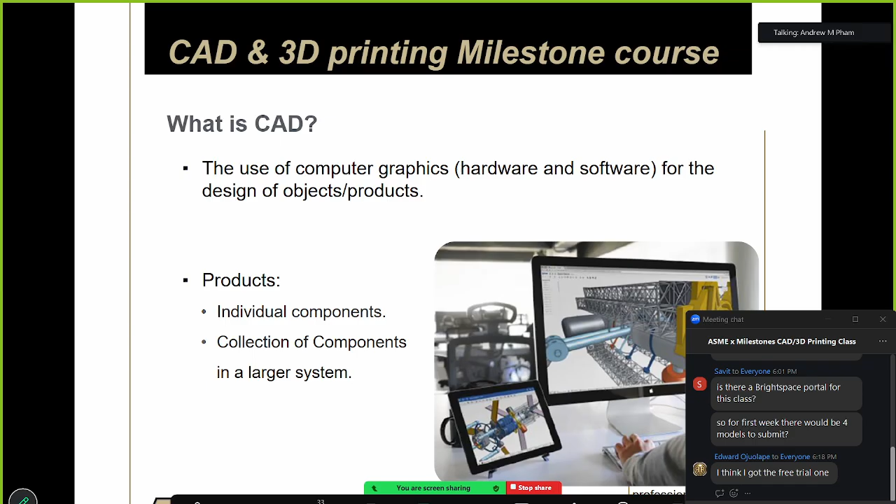I'm going to give a brief introduction to some of the stuff we're doing. I guess the first question is, what is CAD? CAD stands for Computer Aided Design. Basically, before powerful computers existed, we would have rooms of people on easels and paper just drawing up parts, and that's how we did it for a very long time. But then some smart guy at MIT decided that he should use a computer to model things instead, because it allows you to quickly edit things.

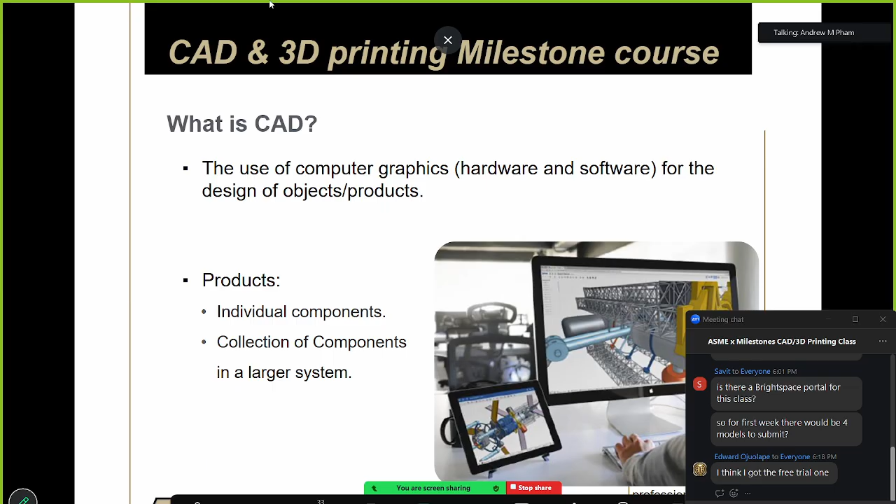So it's pretty cool, you can kind of simulate parts, see if they're going to fail before you make them. That can save you a lot of time and money in the long run. There's both 2D and 3D CAD programs. Fusion is a 3D CAD program, which is pretty sweet.

And then I guess the last thing is there's a manufacturing component. A lot of CAD programs now aren't just CAD programs. I mentioned simulation, which used to be a separate thing, and manufacturing often needed another separate tool in addition to a CAD program. So companies will market their CAD programs as CAD packages because you can do analysis and manufacturing in the same program. Fusion has the ability to do all of this, but we're mainly going to be working on the three-dimensional CAD design stuff.

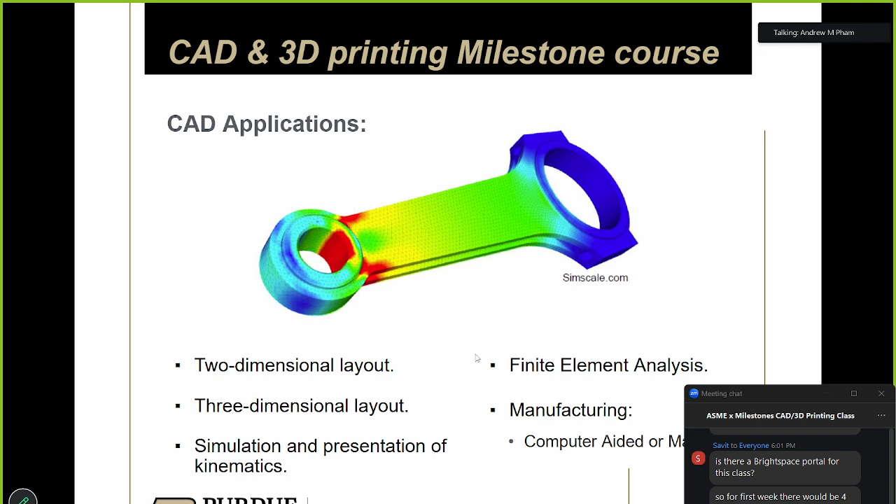But yes, there's a bunch of different CAD softwares out there, like I mentioned earlier. There are even different CAD softwares from Autodesk themselves. Fusion 360 is one of the programs they have, but they also have other programs like Autodesk Inventor and... what is it? Oh yeah, AutoCAD. I don't know why I forgot that.

Autodesk isn't the only company that makes CAD programs. Dassault Systèmes is also a very large, big competitor to them, their main program being SolidWorks. But there's a bunch of other programs like CATIA, Rhino, Onshape, and even free ones. One of them is called FreeCAD, and it's surprisingly okay, but it's also pretty buggy. Again, this is a Fusion course, so we're going to be doing everything in Fusion, with the exception of 3D printing, but we'll get to that later.

Alright, so with that all out of the way, I'm hoping everyone has their licensing at least somewhat in order to the point where Fusion is functional. So we're just going to start making some basic building blocks. Edward, I hope your thing is sorted out. Not to name drop you, but yeah.

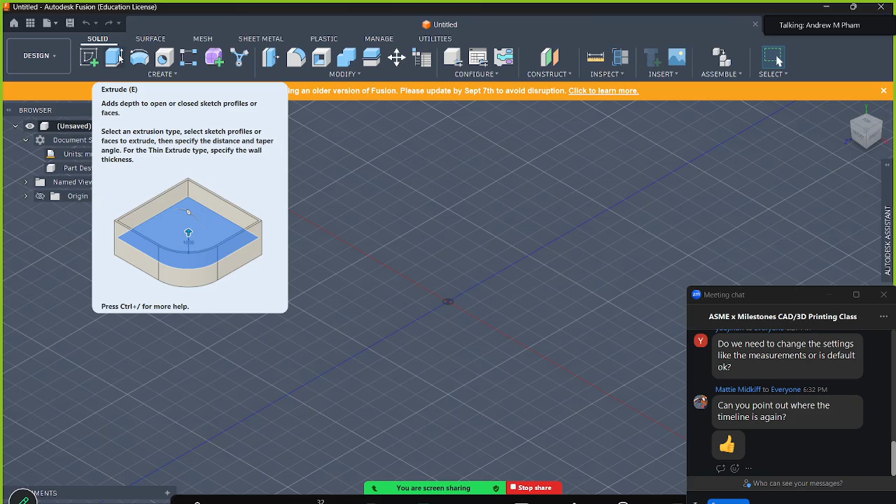One thing I forgot is how you manipulate or move around in the environment, so I'll go over that real quick. This is a 3D space, so it's important to know how to move around in it. You can see I'm spinning around right now, but there are multiple ways of moving around this environment.

The first one is zooming in and out. If you have a mouse, you just scroll in and out, and you can see the grid getting bigger or smaller. Pan is just middle click. One of the reasons we encourage you to have a mouse for this class is so you can use the middle click function—a lot of CAD programs utilize it, so it's pretty useful. The default is middle clicking to pan side to side, so it should be like this.

The last one is orbit, which is the spinning around thing I was doing earlier, and the default for that is shift and middle click. Personally, I changed the controls because I learned CAD on a different program with different controls, but they all essentially do the same thing.

If you don't have a mouse, the easiest way to orbit is using this thing we call the view cube in the right corner. It's a cube that shows you what orientation you're in. You can also use it to snap to certain planes—like here I can snap to the top plane just by clicking on it, and it becomes nice and flat. You can also hold down and drag it to orbit around. That's pretty useful if you don't have a mouse and need it in a pinch, but I do recommend a mouse because it makes things easier.

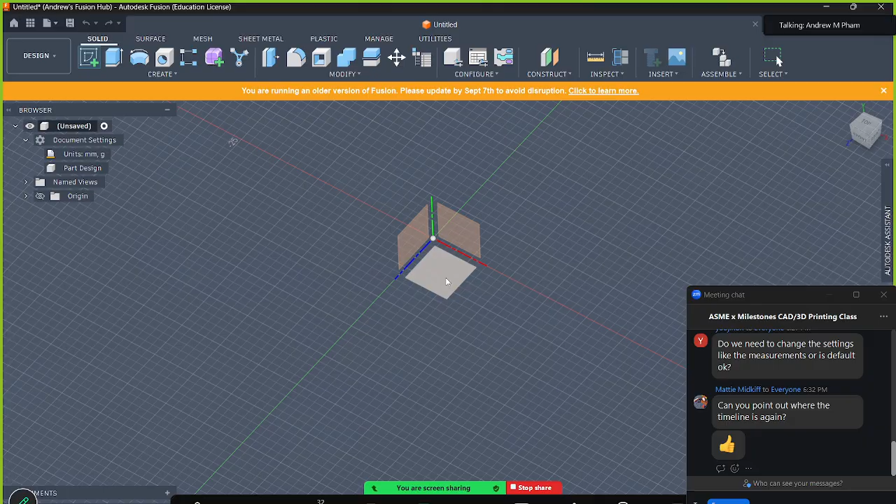I'm just going to select the top plane—it doesn't really matter for this assignment, but I'm going to start with this. When you select the plane, Fusion will snap to the plane you created so you can have a nice 2D workspace. So it snapped to the top plane, which I selected. You can see the toolbar changed—before we were under solid, but now we're under sketch.

These two toolboxes are going to be the most important ones, so you're going to get very familiar with them. For the sketch tools, you can see there's a bunch of different blue and white options, along with some red options. We're mainly going to be working with the blue and white options today—the red constraint stuff is more of a next week thing, but we're going to do a little bit of it today.

Again, we're making a cube, so I want some kind of rectangle. I'm going to select the rectangle tool. It's best practice to start your sketch from the origin, or base at least some of your design off the origin. The origin is this one point here—you can see it's kind of gray, and it's the intersection between this red and green line.

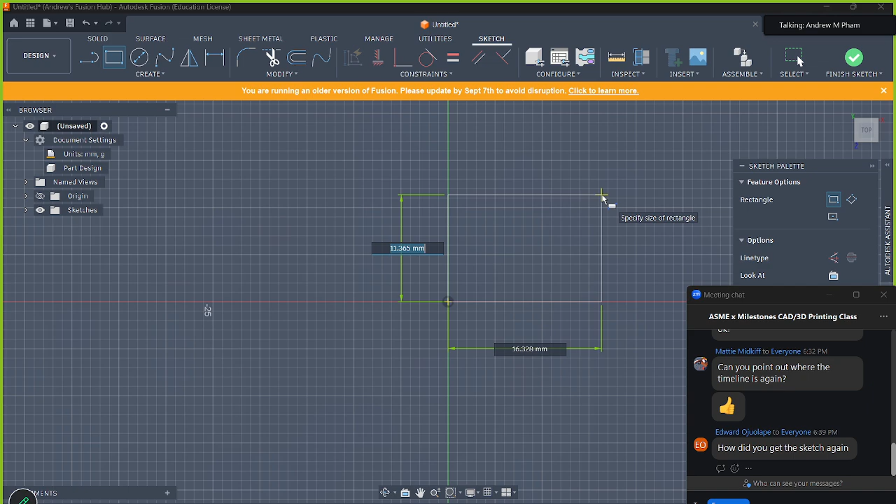So I'm going to create a rectangle. I'm going to start here on the origin. You can see Fusion will kind of snap to it. I'll pull out and make it some rectangular shape.

And then you'll see here that there's 4 lines, but 2 of them are different colors. There's 2 white lines and 2 blue lines. If you're running the light theme, then I think it should be 2 black lines and 2 blue lines, but essentially they're the same thing.

The main thing is that these white lines are constrained, right? Because I drew the rectangle from the origin, this point here is defined. And because of that, these two lines are also defined, because this is a vertical line and this is a horizontal line. And if it intersects with this corner, it always has to be vertical to go, or in this position to go there. These two don't really have any relation to the corner because these lengths haven't been defined yet.

So these can go anywhere they want. So you can see here, if I drag this endpoint here, it moves around.

So the goal for most sketches is to make them fully defined. And in doing so, you kind of create a very precise model of what you're making. So in this case, we're making a square. So these two lines should be equal to each other at some specified length.

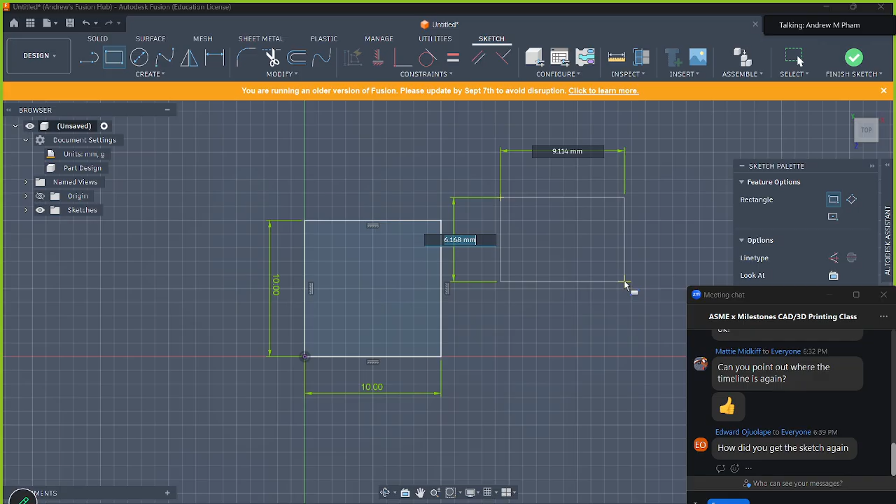Again, the reason for why you want to go from the origin is that when you draw something away from it, like in this case, you can see all of the lines are blue instead of just 2 of them. So, I hope that makes sense.

So the sketch is fully constrained. If you're running the light theme, then these lines will be black, but the same principle applies. You can see here, it's just a 2D square on this plane here, but we need to make it 3D.

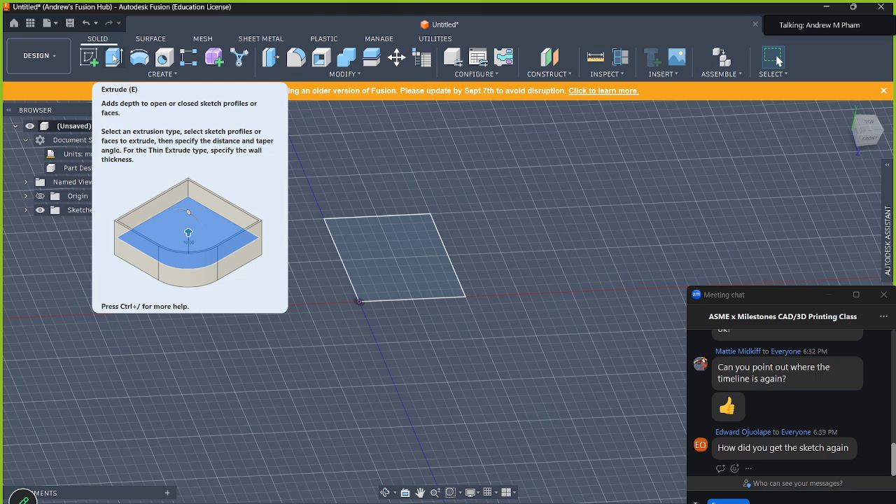So to do that, we need to extrude it. So I'm happy with this sketch. I'm going to finish it to exit the sketch, and then I'm going to extrude it. So there's this extrude function here, right next to the create sketch.

You select that, and then you specify how much you want to extrude it. There's a bunch of different parameters you can choose from for how the tool extrudes itself. In this case, we're just going to use a basic distance specification. So I'm going to set it to 10, and you can see it previews a cube.

There's a bunch of different options, and we're going to be exploring some of them over the next couple weeks. One of the big things is how it starts. In this case, it's starting exactly where we wanted it to, because the square sketch that we created is kind of where we want this to start. If you wanted it to be offset for some reason, you can set it to offset, or you can even set it to start at a certain object.

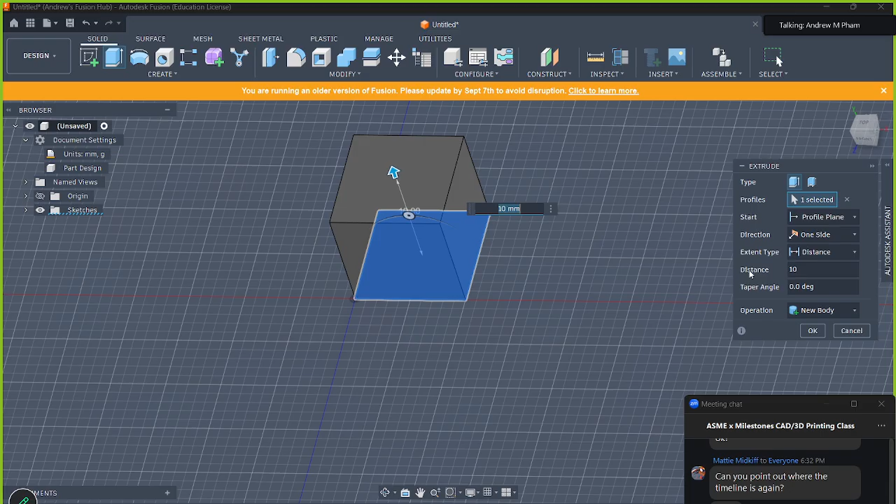In terms of direction, it's just one side because we're going one way, but in some cases you might want it to be extruded in two directions or symmetrically. We'll explore that in later weeks. Extent type again just defaults to distance because we're specifying some number, but we can have it extrude up to something, or even extrude through something, all the way through the model you've created.

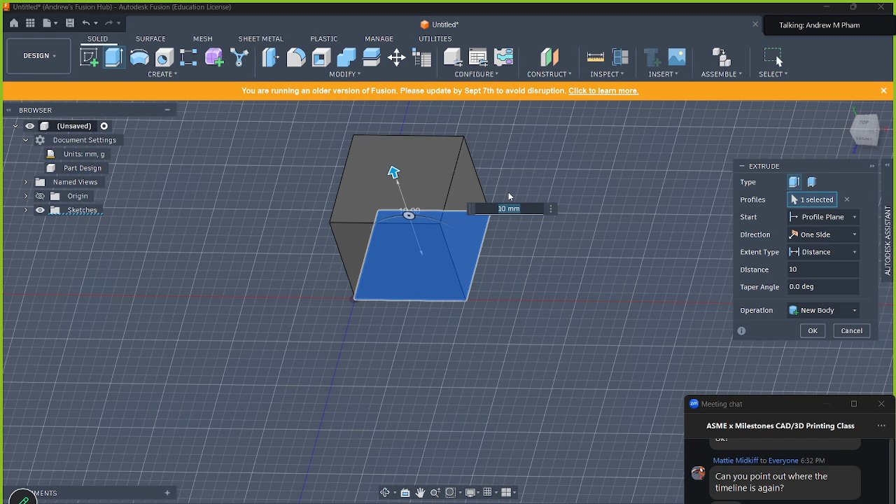But yeah, you have this basic cube. I'm happy with it. I'm going to press OK, and then bam, we have one nice, lovely cube.

Does anyone have any questions? I purposely go kind of slow on the first one.

Is the extrusion fixed? Is the extension fixed, like the 2D lines? Are you saying, is the extrusion fixed? Is that what you're asking? I'm assuming that's what you're asking. The extrusion is specified.

You can change the extrusion. The way you do that is by going into the timeline and editing the function or tool you used. You can see here it's a little bit more clear that it's a timeline now. The first icon is the initial sketch we made, and the second one is the extrusion. For example, if you wanted this to not be a cube and wanted the extrusion to be longer, you can right click the extrusion, hit edit feature, and then change this distance. You can make it 20 instead, and then it becomes larger.

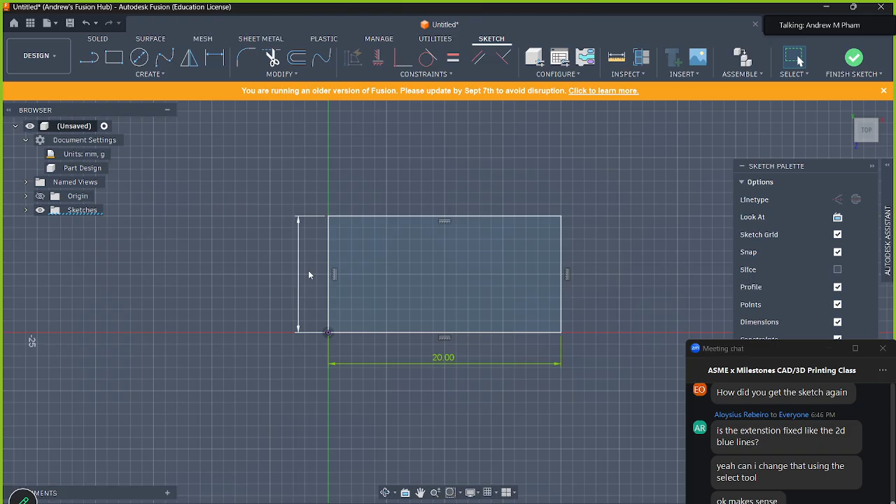And then again, you can edit sketches as well. This is why CAD programs are super powerful, because you can go back and change things. Back in the day, people did all of this on paper, and if you wanted to make a change, you'd have to erase it or start from a new piece of paper. But for this, you can enter the sketch, change dimensions, and finish it. And then boom, this cube is now larger.

The last thing for this cube is that we want to apply some kind of appearance to it. In this case, you can see this cube is gray. To do that, we need to open the appearance library and apply an appearance. I found the easiest way is just to use the shortcut and press A. So I'm going to press A, and then it opens the appearance library. You can see the default is just having this nice boring gray color.

For many of the assignments, I'm going to ask you to apply an appearance. When you do apply an appearance, please don't make it gray or black. I'd much prefer if it was a nice colorful color, just because it makes it a lot more clear when I'm grading. If it looks gray to me, I might take points off. So if you did apply an appearance that was gray and you're wondering why you lost points, that's probably why.

Generally, for me, when I do these things, I use the paint appearance. So you can go under paint, I usually go under glossy, and then you can select some kind of color. Again, please don't use gray. Let's make this cube blue. So there's this nice blue color.

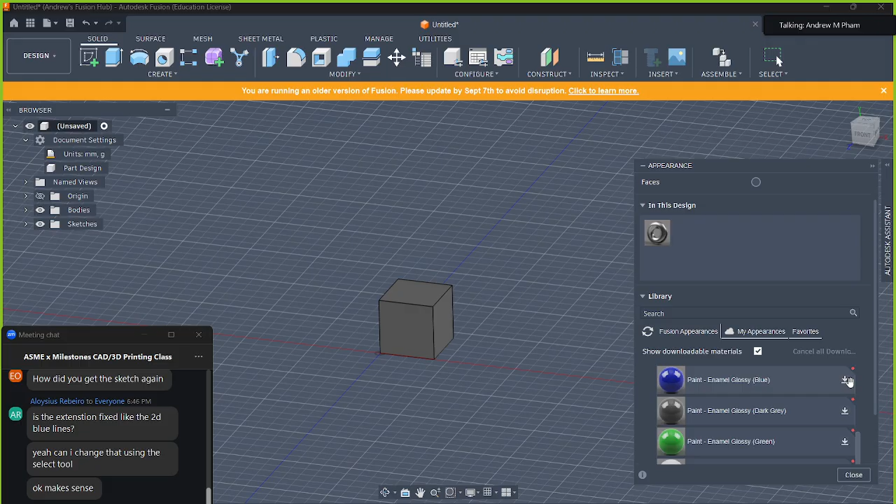Oftentimes you have to download the appearance before you use it, so there's this download icon. It should be pretty fast. But then it's just drag and drop. So you just take this color, drag it on, and let go. And you have a nice blue cube, or whatever color you specified.

I hope that makes sense. Yeah, please don't use gray or a black color, or else I might just take off points.

How do I move the cube around? If you're talking about moving it in space like I'm doing right now, you can see the origin is here and the cube is fixed to that origin. I'm moving around it. If you want to move it in the environment, I would just encourage you to edit the sketch to manipulate it.

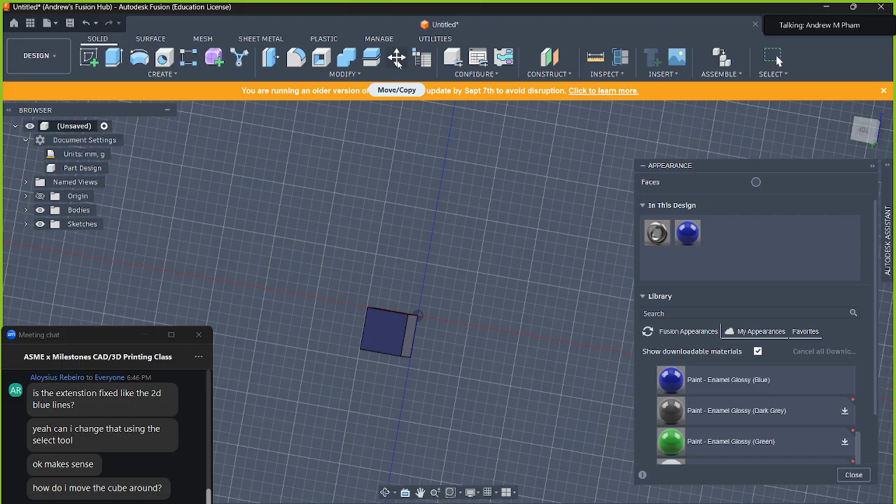There is this move/copy command, but I really discourage you using this because it adds stuff in the timeline, and then you might move the thing and then make a sketch off of it, and then it makes things really messy because your initial sketch was over here, but then because you're referencing it from over here, like this face is here, it gets kind of weird.

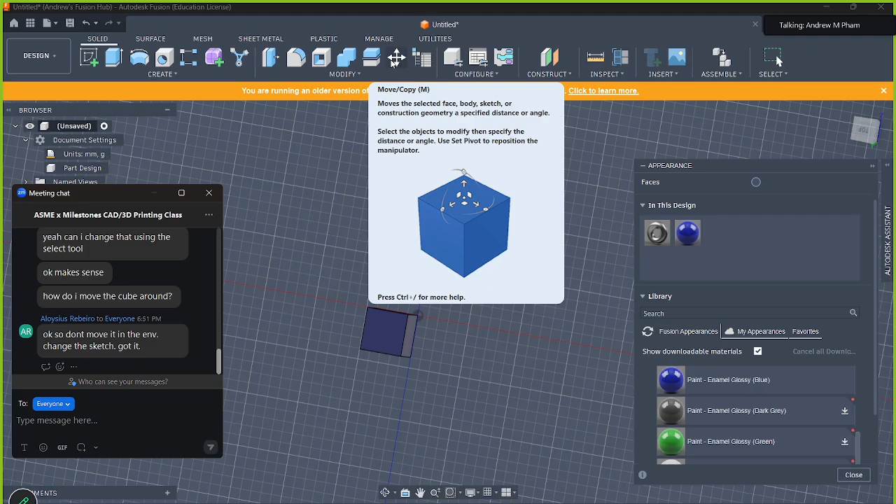Yeah, so don't use this move copy command. I really don't like it. It's kind of a personal thing, but just note that most other CAD programs don't have a function like this. So generally that's why I don't like using it, because I'm familiar with other CAD programs and they don't really have this. So I've just gotten used to living without it, and it's usually been okay.

Any other questions about moving around?

Okay, cool. So now that we have this cube finished, for those who might be experienced with CAD, you might be falling asleep because this is a pretty chill thing to do. But now that you understand this principle, I'm going to move a little bit faster for the next ones.

So for the cylinder, there's two ways we could go about doing this. We can do what we did with the cube: just draw a circle and extrude it to make it 3D. But we can also revolve it, which is what we're going to do in the game piece in a little bit. If you've taken calculus and done the disc and washer stuff, this is basically an applied version of disc and washers, where you have some 2D profile, you select a plane, and then you copy it 360 degrees. So that's what I'm going to do now.

If you chop a cylinder into quarters and you looked at it from one side, it's just a rectangle. So what I'm going to do is draw a rectangle on a 2D plane, and then revolve it.

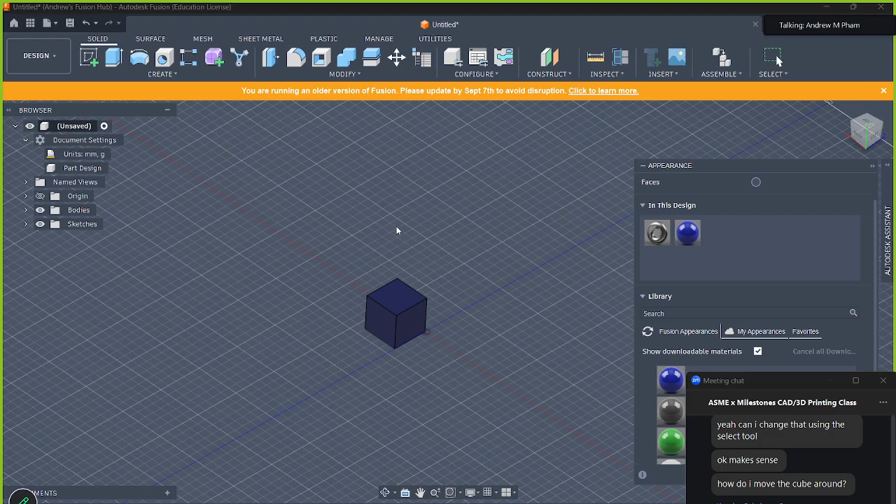Close this. I'm going to create a sketch. I can either pick the initial planes that Fusion generates, or I can select one of the planes that we've created with our cube. So it's pretty useful. You can create features on top of features that you've created, or you can create sketches on top of features that you've created. So we're going to do that now.

We're going to select this plane here. And then I'm going to be kind of bad and create a sketch that's not based off the origin. Again, in general, it's good practice to model things off the origin, but because I'm just making a bunch of blocks in the same model, I'm just going to space them out a little bit so they don't phase through each other. In general, if I was making this for something else, I would have designed these different game pieces or blocks in separate documents. But I'm going to leave it as is.

So I drew this rectangle. One of the things you'll notice, I did this on purpose: you can see I've drawn this rectangle on this red line here, right? Fusion will even snap to the red line, but you can see all of these are blue. So you can see I can manipulate it even though I thought it was on this red line.

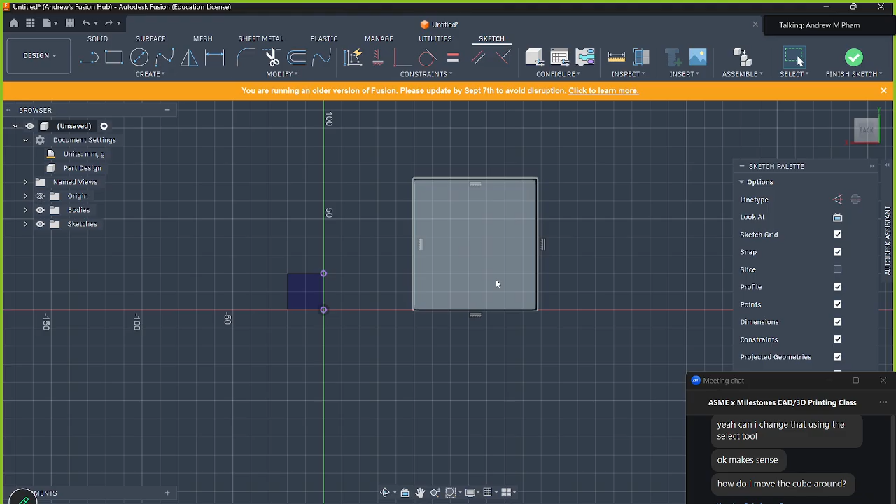And that's just because these haven't been constrained. So that's why I recommend you going off the origin, because if you did, there's at least some points on the rectangle that's constrained, or whatever geometry you're working on, but these aren't. And sometimes they're deceptive because, again, I drew it on this line exactly, but it's not constrained to the line, so I can still manipulate it. When you create complex sketches, sometimes you may make an assumption, and you're wondering why isn't this thing fully constrained, right? Why is this line blue? Why is it not white or black? And sometimes it's because you made some kind of assumption that this is constrained to something. In this case, you might assume that it's constrained to this red line, but it's actually not. And then you have to go in and add those constraints later. So that's why generally, starting from the origin is good practice, or that's one of the reasons.

So I'm just going to do that. I'm going to add some dimensions.

So you notice that from the cube, I just needed 2 dimensions to make it fully constrained. There's 2 dimensions here, but it's not constrained at all because I can move it around in space. Because it's away from the origin, I need to add 2 more constraints to make it fully defined.

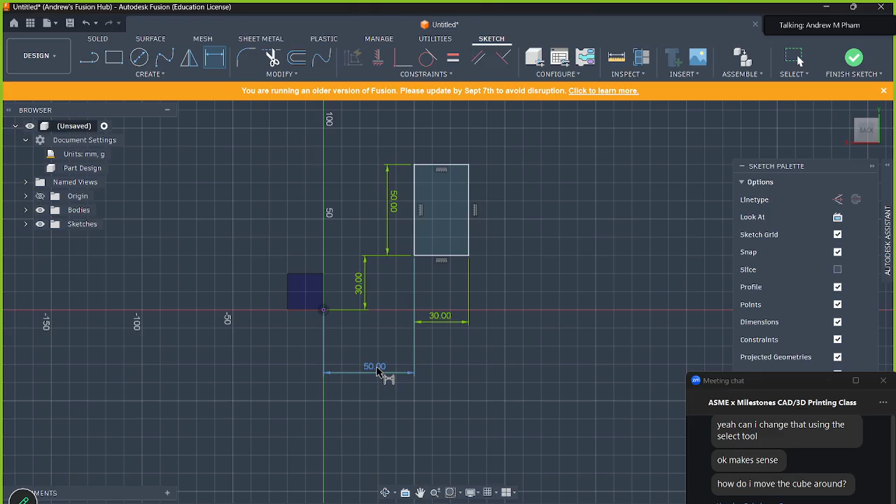So I added this 30 here, this 50 there, and then the length and the height of this rectangle. It's fully constrained. Again, it's a fully closed sketch, right? I can highlight it, it's blue inside, so that's good.

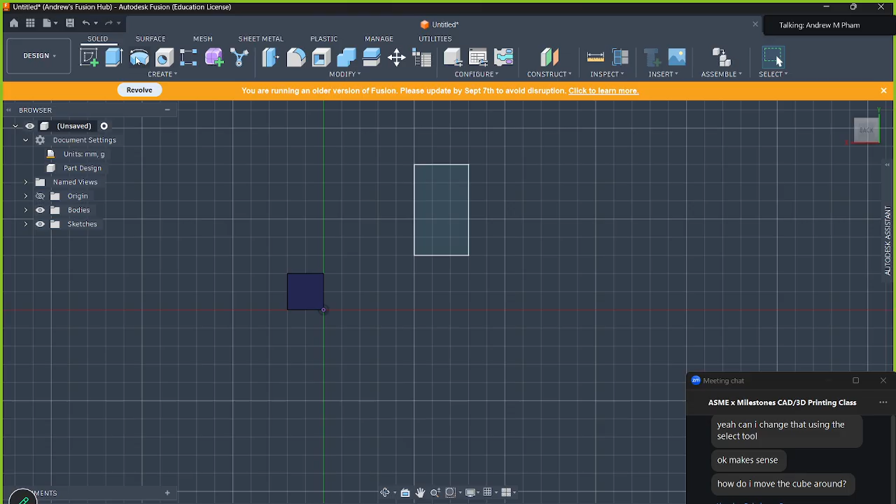I'm going to finish the sketch, and then revolve it. There's this revolve tool, right next to extrude. It'll ask you to select a profile - in this case it automatically selected it. If it didn't, you would go under select, click on it, and then it asks you to specify an axis of rotation. To make it the cylinder I want, I'm going to select this vertical line here, and it creates that cylinder.

You can select different ones, and it'll result in a different geometry. This one looks good to me. You can see you can have it do a full 360, which is what we want, or you can change it. In this case, I want 360, so I'm going to leave it.

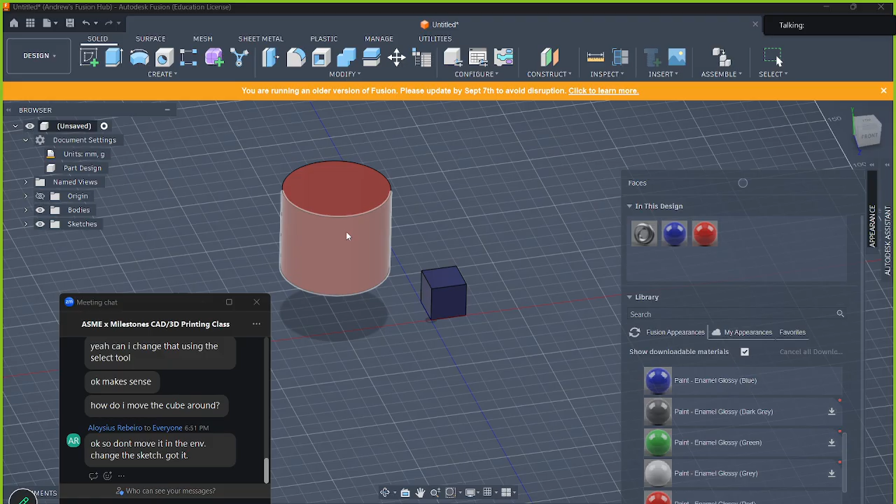We have this cylinder here. We're going to add an appearance. I'm going to make this one red. And then boom, we have our cylinder.

Everyone good? Feel free to speak up if you want me to do something again, I don't mind. Okay, seems like everyone's good.

So I'm going to do the last one. Oh, show the revolve, okay.

One of the cool things about the timeline is that you can roll things back. You can see this vertical line here, and then the revolve there. If I drag this vertical line to be before the revolve, it will go away, so it'll let me do it again.

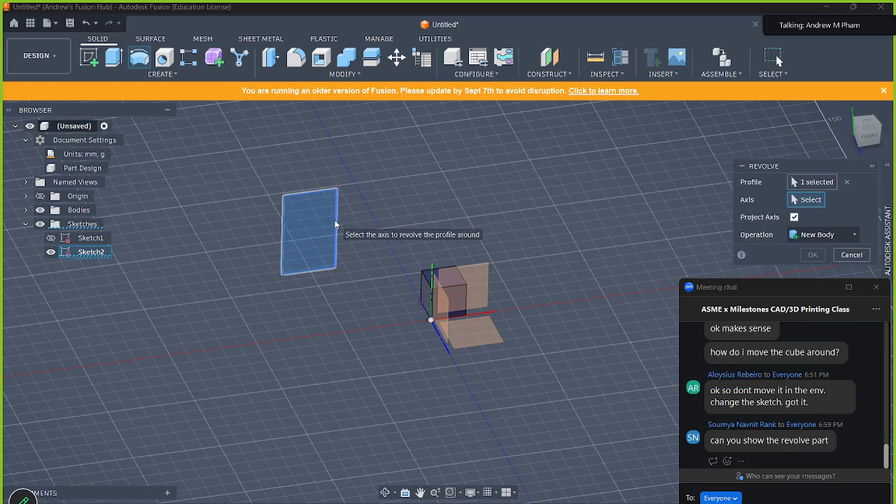There's also a folder of the sketches I've created. In this case, the sketch for the revolve is sketch 2, so I'm going to show it again, and then revolve it. The revolve tool is up here under solid. We have our sketch, and you need to select some kind of profile - in this case, this closed area that we created with the rectangle. It'll ask you to specify an axis, so you click on that, and then you click on some kind of line. In this case I selected this one, and then you've created your revolve, just like that.

Can you show how to fully constrain the sketch again? Yes. These are good questions, so please don't feel bad for asking.

So sketch constraining again is very important - we're going to be talking about it more next week. Your goal is to make it so all of your lines are either white or black, depending on your theme. That basically means it won't allow you to manipulate it in some kind of free way.

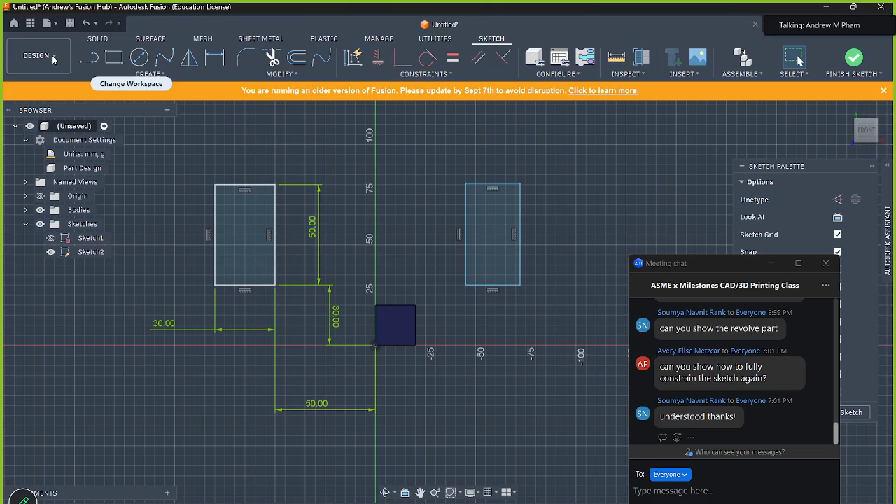You can see here, this rectangle, if I try to drag one of the corners, it doesn't let me do anything. But if I make another one over here and it's blue, I can drag it around. So to constrain it, you need to add some kind of dimension to lock certain parts of your sketch into space.

We're going to go over geometric constraints next week, which is another way to constrain your stuff, but we're going to keep it simple and just do sketch dimensions. In this case, you're working on a 2D plane, so all of this needs to be constrained in at least two directions. This line can move up and down, or left and right, which is also just its length, so we need to constrain these things.

So to make sure this line can't go up and down, we can add a vertical dimension. I'm adding this sketch dimension here, selecting this horizontal line, and then referencing something that's already fixed. In this case, the origin is the only fixed point, ignoring this whole thing on the left. So I'm going to click on the origin - you can see it'll allow me to have this vertical dimension. You have to specify it, I'll do like 10 or something.

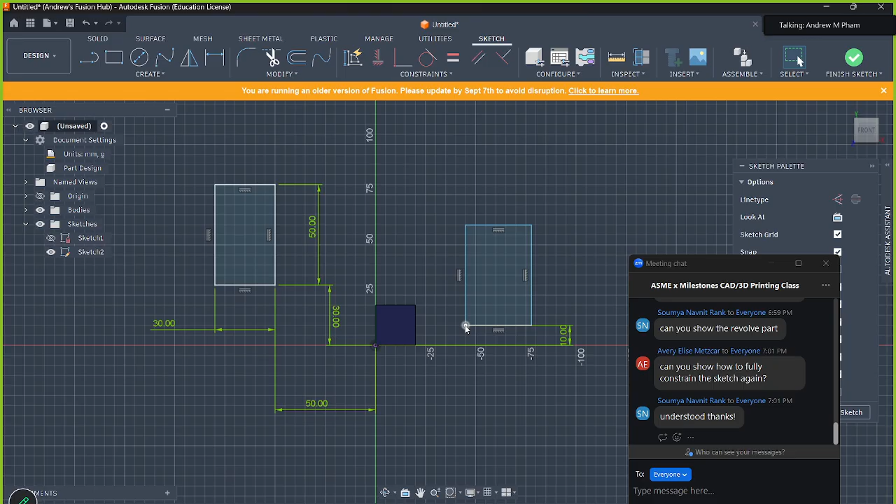So you can see here, now it's white, right? This line is white because it can't move up and down, but it can still go side to side, which is why these two vertical lines are blue. So we need to change that.

So we're going to go under sketch dimension 2. I'm going to specify this dimension here. You can see this is constrained. I have to set this dimension. So I can either do like the width of this, or I could do like this, right?

And then I need to specify some vertical dimension to constrain this. So I could do like the height of this rectangle, or I could do the distance from the origin to the top, right?

Again, the reason why I encourage you to start from the origin is that it will save you from having to do 2 extra ones. Because you need to specify this one and this one to get these constrained, where you could have just drawn it here and it would have been constrained automatically. So that's the reason why you should start from the origin. This is an edge case because we're doing multiple things in the same one.

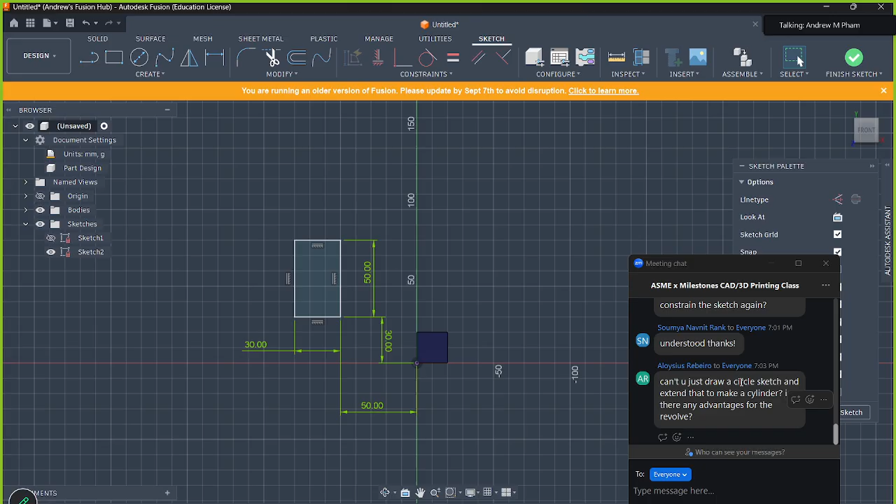So for example, if I wanted a cylinder with a hole through it, I'll do one real quick. If I wanted to do that with just extrudes, I'd have to draw a circle and extrude it, then draw another circle and cut it out. That's technically 2 features, but I can reduce it by doing something like this.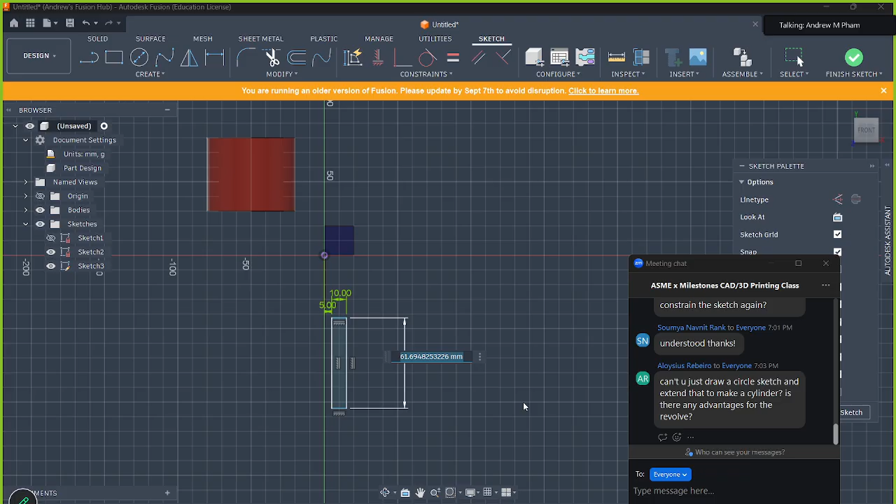So I'm leaving a little bit of a gap between here and the origin. Let's just say this is 5, and then this is 10, and this is, I don't know, 40. I'm going to leave these two unconstrained, but the principle still applies. So I have this here.

Where did it go? Oh. Oh, jeez. Oh, there it is. Okay.

So I have this sketch here. If I revolve it on this vertical axis, you can see I just drew a rectangle, but now I have a more complicated part. It's a cylinder with a hole through it, and I just drew a rectangle.

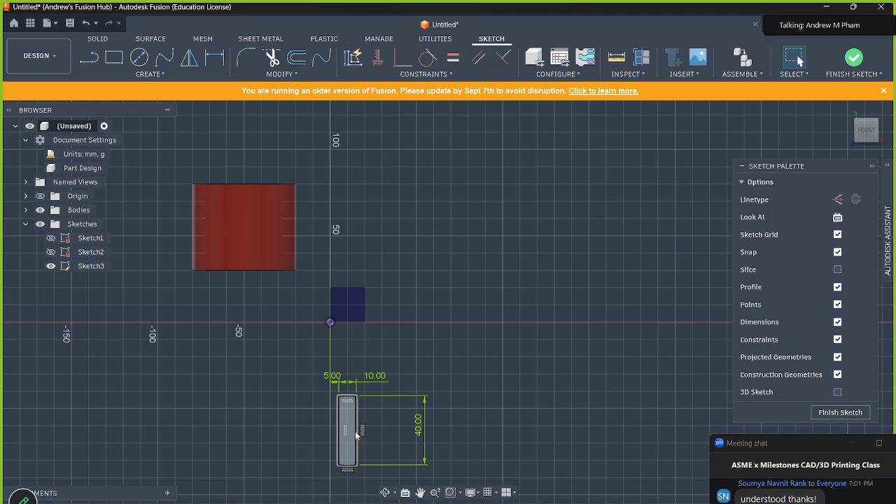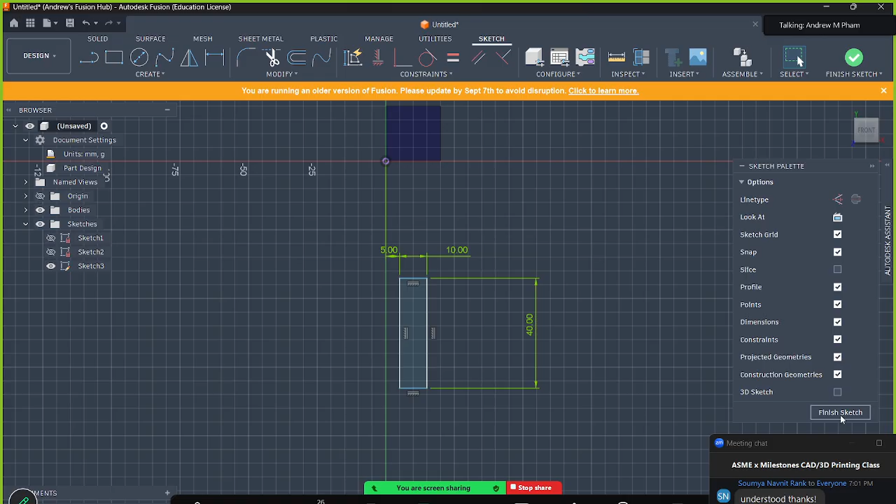Oh gosh, why is it doing that? So that's one of the advantages to using revolves. Obviously it doesn't apply to every scenario, and different people have different CAD preferences. Some people really love the revolve tool and use it for something they could just extrude. Others prefer the extrude tool and would be happy extruding it and then cutting out the center. Either way is valid, and there are scenarios where you might prefer one tool over the other, but at the end of the day you can achieve the same geometry with 2 different tools.

Delete this. Okay, so the last one here is making this block. This kind of goes back to the question you just asked, right? There's more than one way of doing this. We could make a rectangular prism and then cut away the round part, or we could do it all at the same time and extrude it from this face. Depending on your CAD style, or the part you're modeling, you might want to do it one way or the other. In this case, I'm going to just do it all in one sketch.

Can you show how you revolve from the sketch? Yes.

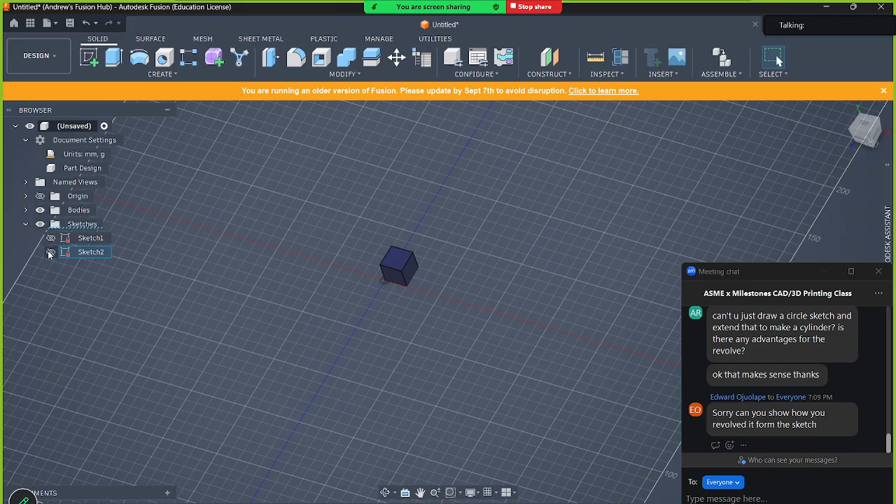Okay, so we have the sketch here. You just want to hit revolve. It auto selects here, but if it doesn't, you just have to click profile over here, specify it, and then you pick an axis. So you hit select, and then you pick one of these lines. In this case, I chose this one. And then you just press OK.

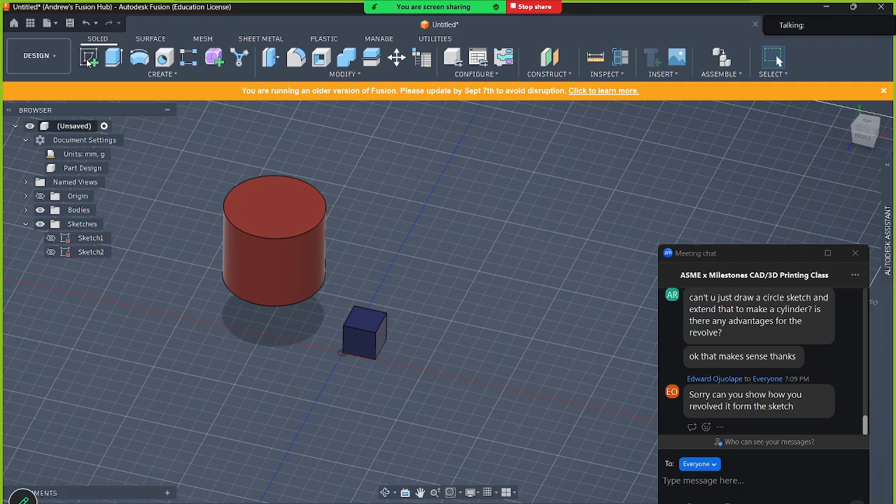Okay, so for the last one, I'm going to do it all in one sketch. So I'm going to select this plane here. I'm going to create a rectangle, and again I'll do this over here. We need to add constraints. Looks fine.

Okay, so I've added these constraints. Again, like I said earlier, sometimes it looks like it's in the right spot, which in this case it is, but it's not fully constrained, because there technically is no constraint given. So be aware of that, because that sometimes messes up your sketches, and you're like, why isn't this constrained? Because it's where I want it to be. So sometimes you have to just drag things around to figure out what's unconstrained.

One little tip I have is oftentimes I'll draw things quote unquote improperly, or not exactly in the spot where it's going to be. And then I go back and apply the dimensions or constraints that I want, just so I can visually watch it go to the spot where I want it to be, rather than it already being in the spot where I want it to be, and then I assume the constraints are applied properly. And that saved me a good amount of headache when it comes to troubleshooting why something's not constrained.

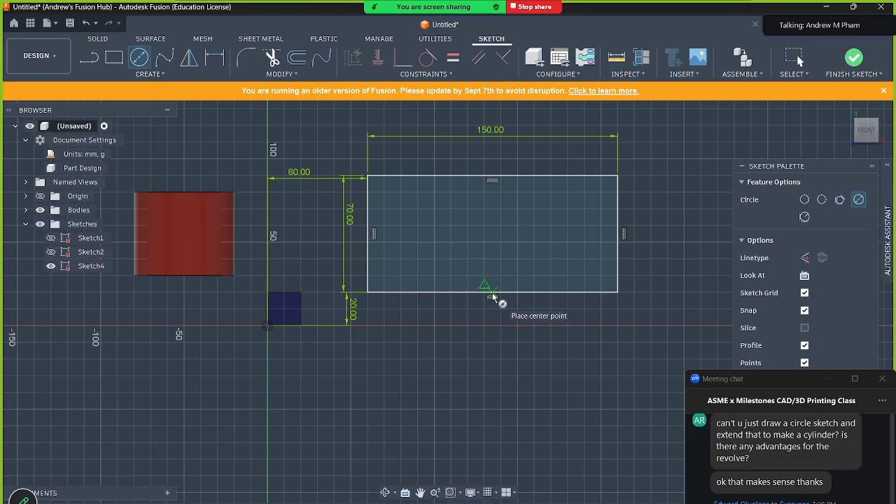Okay, so we have this rectangle here, and then we want to get this kind of arch shape going. So in that case, I'm going to draw a circle on top of this. I want this to be centered, so I'm going to hover across the line, and you can see it kind of snaps at a certain point. When it snaps with this triangle, that's the midpoint symbol, so you know you're in the middle of this line. So it snaps there.

I'm going to add some dimension, and that looks good to me, right? So you can see we have that geometry that we're looking for, but we also have a bunch of extra stuff. In some cases that's fine. You can just exit and extrude this.

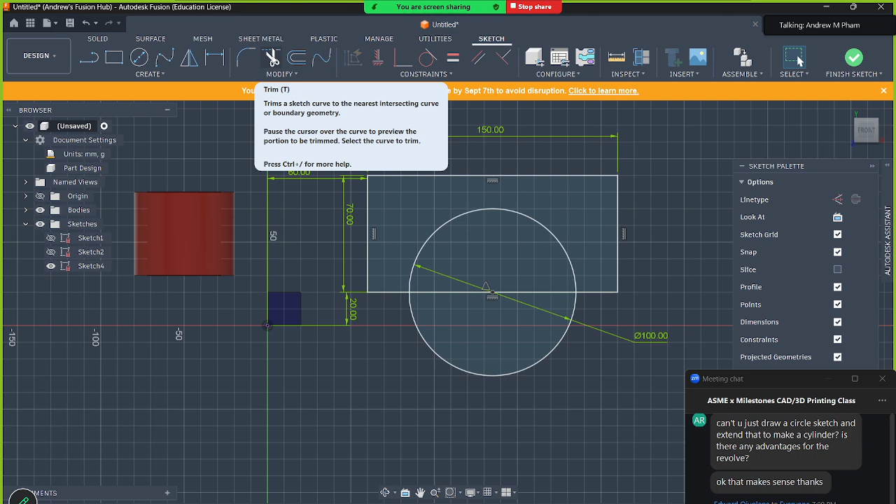But in the case where you didn't want this, you can also trim it away with the trim tool. So if you go on the toolbar, there's this scissor icon, or the hotkey is T. You can select the tool, and then you can get rid of the stuff that you don't want. So what the trim tool does is, when you select a line or an arc, it'll trim it away to the next two nodes, or points where it intersects something else.

So in this case, this line is going horizontally through this circle. So when I hover over this bottom half, you can see it kind of highlights pink, where it's gonna cut away. So if you click it, it disappears. In this case, I don't want this horizontal line in the middle either, so I'm gonna get rid of that. You can click it, or you can also hold down left click, and then run your mouse through where you want to cut. So I'm holding down left click, and then I move my mouse, and it goes away.

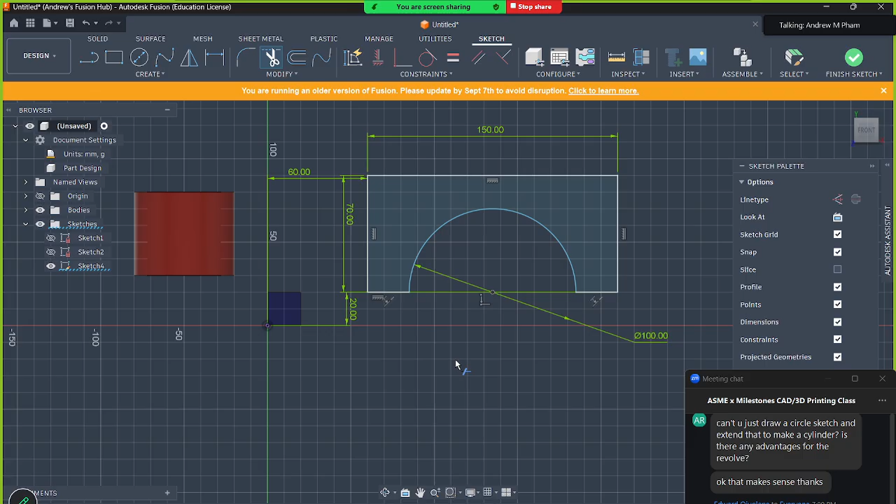In this case, you can see when I cut that line away, it made the arc unconstrained. And that's because the center point of the circle was based on the midpoint of that line, but we just cut the line, so that midpoint doesn't exist anymore. And now this circle is unconstrained. So we need to go back and fix this, because it can move side to side. We don't want that.

We could do it in different ways. Like in one case, we can add this dimension and then do some math. This is 150, this is 100. And if we want both sides to be equal, this has to be 25, right? This is perfectly fine, it's centered, that's what we want. But what happens if I change this to 200? It's not centered anymore. And in some cases, this might be exactly what you want, but in this case, it's not really what we're looking for. We want it to be centered.

So a little bit of a week 2 preview. What we can do is we can set these two lines to always be equal to each other. So we're going to use some geometric constraints. There's these red icons here, and there's this equal constraint right there. So I'm going to select that tool. I'm going to click on this line, and then this line, and then bam, they're equal. And if I change this back to 150... wow, lag is crazy.

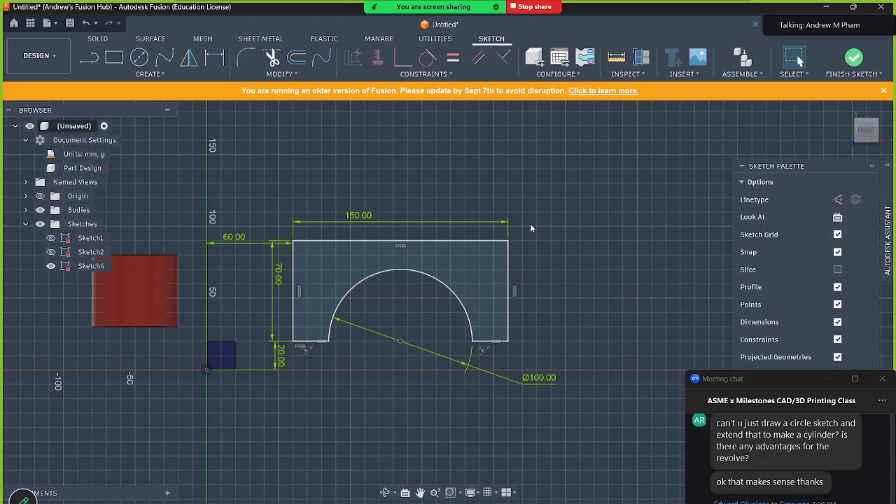Okay, now that we have that, we're going to do what we did before: extrude it, and apply an appearance.

All right, does anyone have any questions about this assignment? Because if you were following along and did all of this properly, you just got 10 points. Everything good?

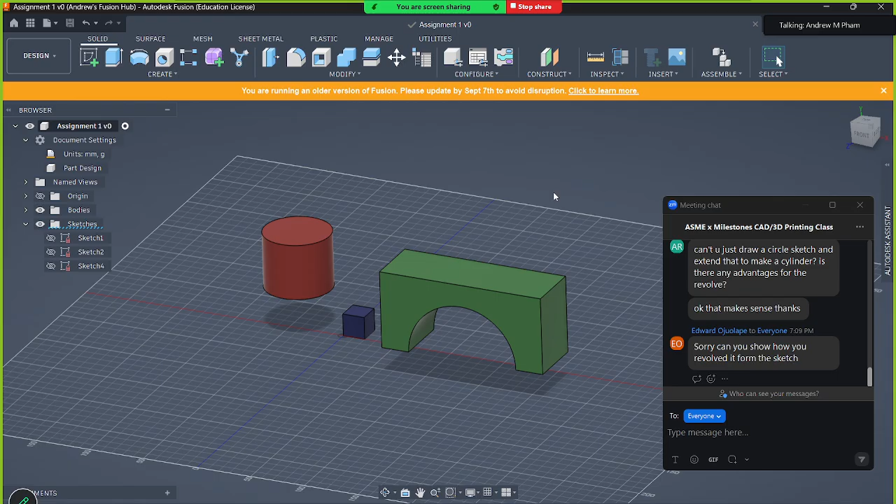Okay, so this looks good to me. I'm gonna save it, and then I'm gonna make a new file. So I'm gonna do Control N, or Command N if you're using Mac. And now I'm gonna start on this hammer.

So if we look at the hammer, there's a couple things going on here. There's this cylinder looking thing with another cylinder on top, and then there's this rectangular prism with some curved edges. So again, there's more than one way of doing this. Personally, I like to start with the handle, so I'm going to make some kind of cylinder, but I'm going to combine both the top and the bottom cylinder as one thing. So what I'm going to do is make one cylinder and then make a rectangular prism at an offset from the top, so it might make a bit more sense once I start doing it. It's perfectly valid if you make one cylinder, a rectangular prism, and another cylinder on top, but I think what I'm going to do is a little bit more efficient.

So I'm going to start a sketch here. I'm going to click on the top, I'm going to create a circle, and then again it's based off the origin. I'm going to add some dimension here.

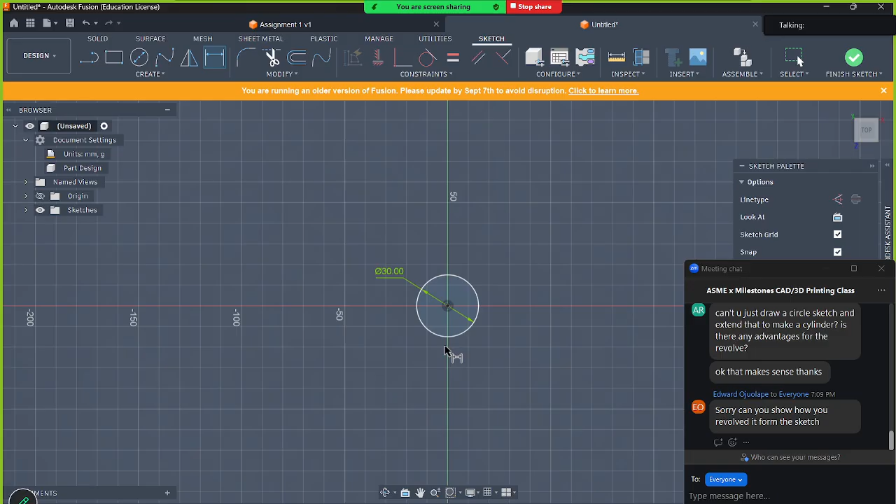Finish this, and then I'm going to extrude it. I'm going to make this extrusion kind of extra long, like 300. Yeah, that looks good.

So I have this cylinder here, but now I want to make that hammer head. So what I'm going to do is draw a rectangle that's centered on this circle. I'll create a sketch, select the top face of the cylinder, and then draw my rectangle.

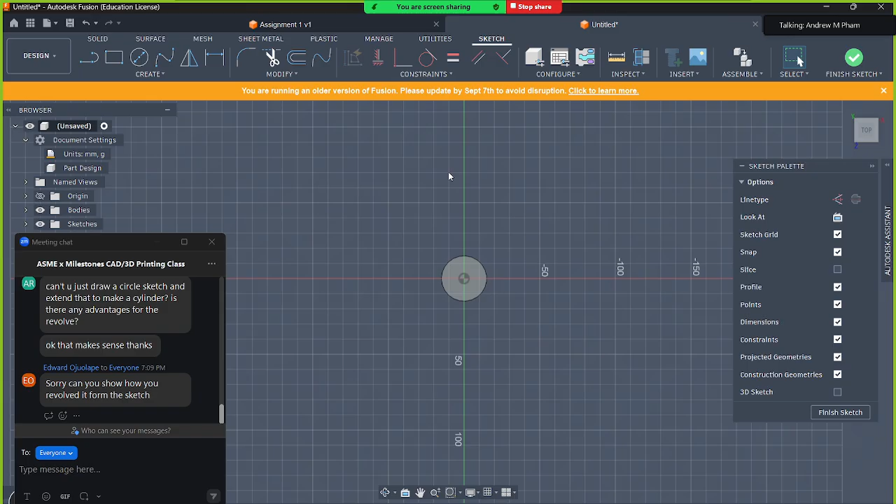This is a good scenario to show why you want to base things off the origin, because this circle is centered on the origin, and I also want this rectangle centered on the origin. If the circle had an offset, I'd also have to apply that offset to the rectangle, meaning more dimensions, and if the offset changed on the circle, you'd have to go back and edit the rectangle too. So to avoid that, I just base things off the origin.

In this case, I want a centered rectangle, so I'll go under the Create menu, under Rectangle and Centered Rectangle. You can see there's a bunch of extra sketch tools if you're curious, but I'm going to make a centered rectangle here and specify some dimensions. That looks good to me.

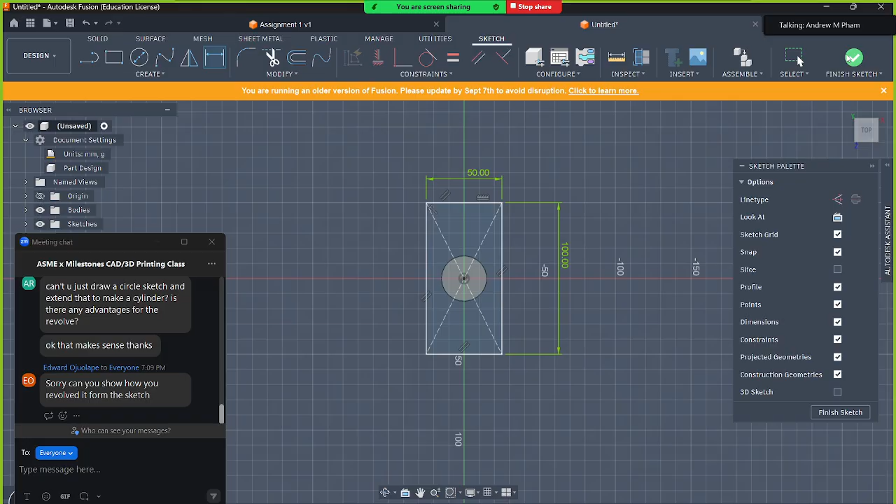Again, centered on the origin, I only need two things—nice and quick, nice and easy. I'm going to finish this sketch and then get ready to extrude it now.

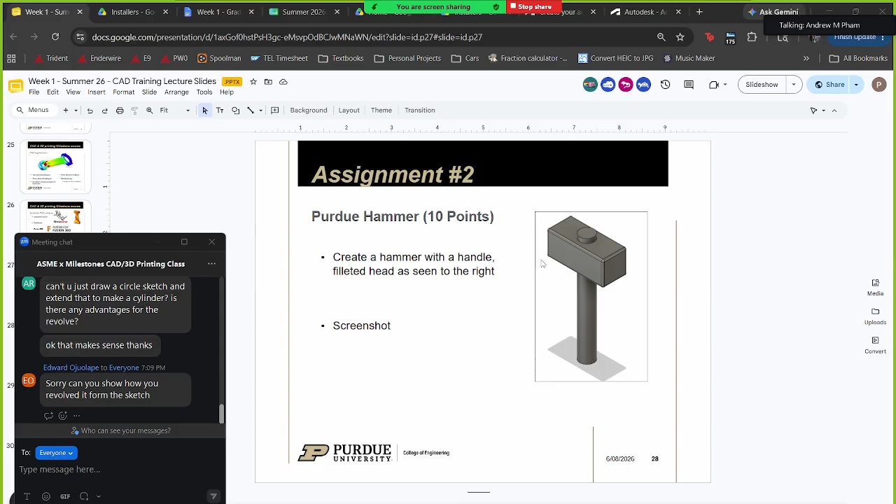You can see I made the sketch on this top face, but we also want a little bit of it exposed. So I'm going to create an extrusion, select this profile, and instead of starting on the profile plane where I sketched it, I'm going to set it as offset instead.

Someone asked, can you show that centered rectangle method again? When you're under the sketch, go under the Create tab. There's a rectangle option, and then a centered rectangle option. Wherever you start dragging from is going to be the center of your rectangle. So I put my mouse on the origin and then drag it out, if that makes sense.

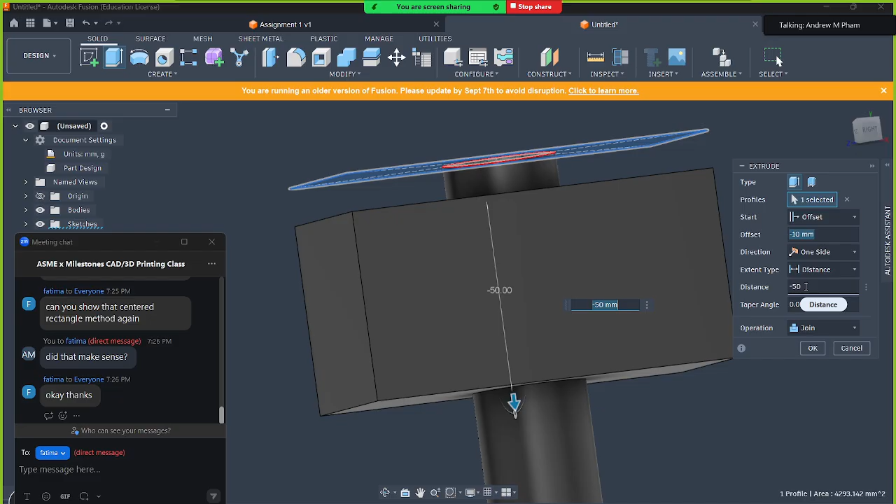And there we go. You can see this blue area is where the sketch was created, but there's an offset of, in my case, 10 millimeters. So there's a 10 millimeter gap before the extrusion starts and extrudes downwards 50 millimeters. That's one of the ways you can use the offset from the sketch, or for the extrusion.

So now I have a hammer. You can see in the timeline there are only two major features here—these two blue icons are the two different extrusions I made. It's a little more compact, a little more efficient, and I like that.

The last thing for the hammer is adding some fillets, or rounded edges. There's this tool here called the fillet tool, and when you enter it, you just start selecting edges or faces that you want with rounded corners.

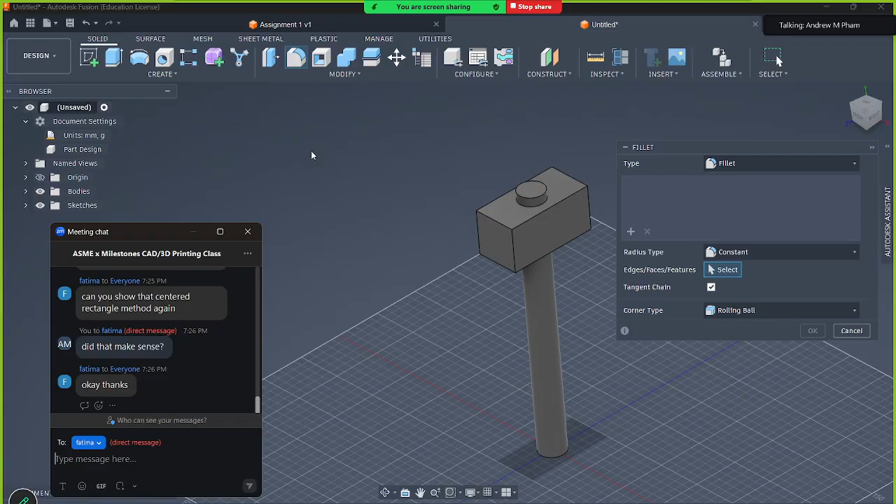So what I'm going to do here is select these two faces, spin around, and then select these edges. Once you have those things selected, you specify some radius, and then it rounds them nicely.

One thing to note, this is something kind of unique to Fusion, at least compared to other programs I've tried—you can nest different features. In this case, I can nest more than one fillet in the same tool. Let me redo this for a second.

For a lot of programs, if you want one part to have a certain fillet radius and another to have a different radius, you'd have to create two separate fillet tools. But you can combine them in Fusion, which I find kind of cool.

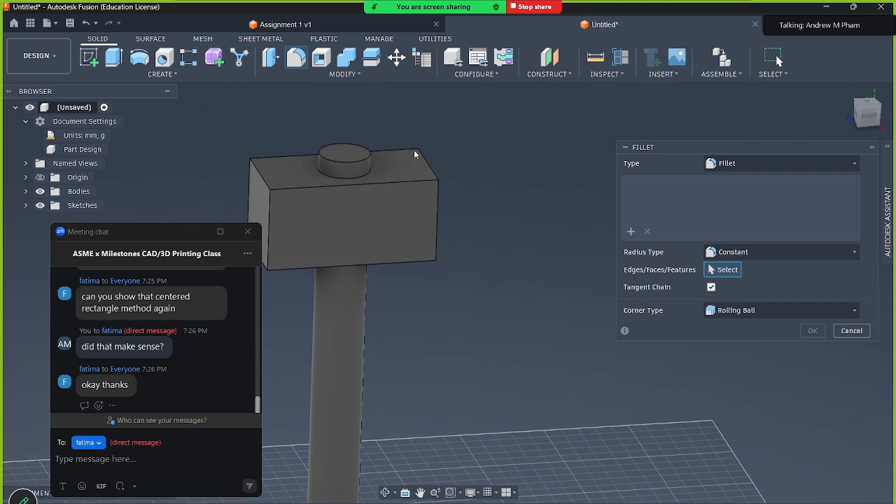Let's say we want these faces to have small fillets and these edges to have larger fillets. So I can select these two faces and do a 5 millimeter fillet, then add more fillets by adding a selection set here and selecting these separately.

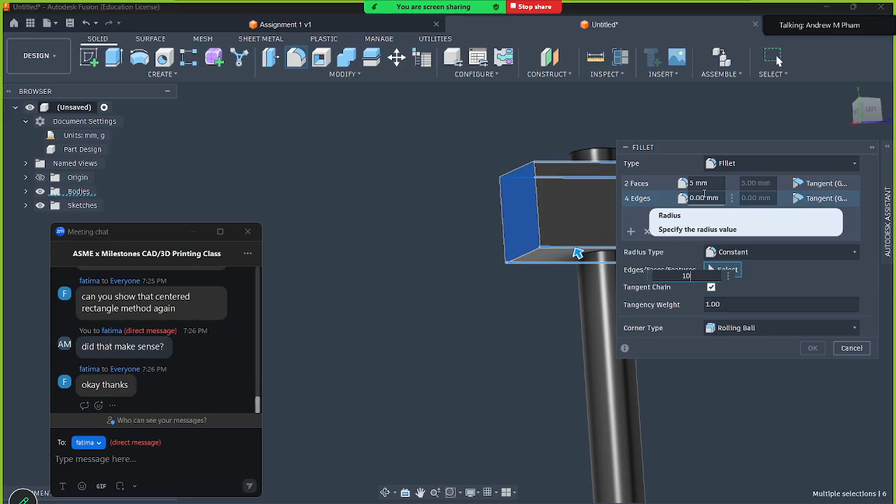So I can set this to like 10, like it was before. Now you can see these radii are larger than these. But once I finish this, they're all housed in the same function, which I think is really nice.

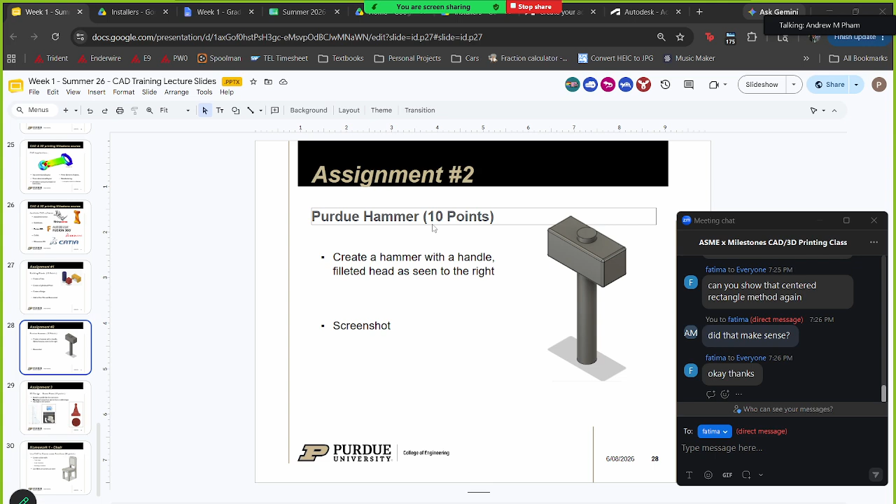That's just kind of a side tangent thing. But if you followed along, you should have this hammer piece right here. It's technically past class time, so if you need to go, feel free to leave, but I'm going to try to crank out this game piece real quick. Any questions on this before I move on?

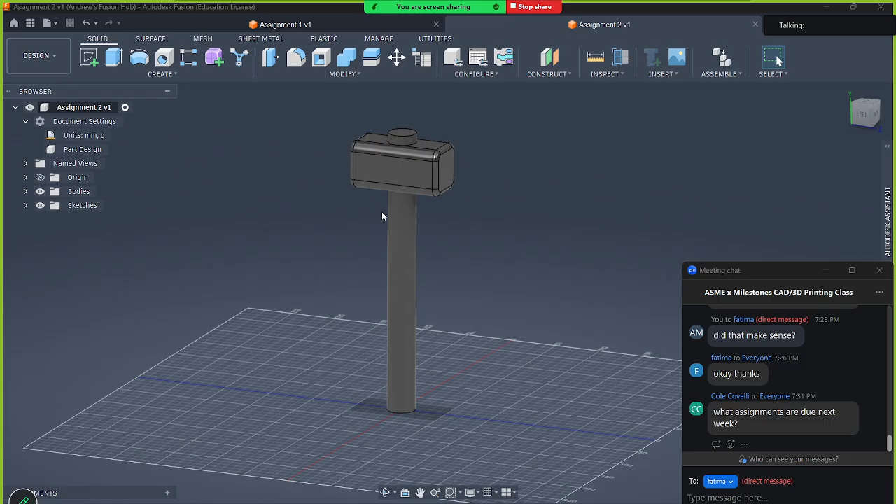So I made a new document and I'm creating a sketch. In this case, I typically don't pick the top plane, I usually pick left or right, and then I just start sketching. One thing I like to do is throw down a bunch of lines and arcs and then constrain them afterwards. Some people like to do one thing at a time, but I like a little bit of chaos.

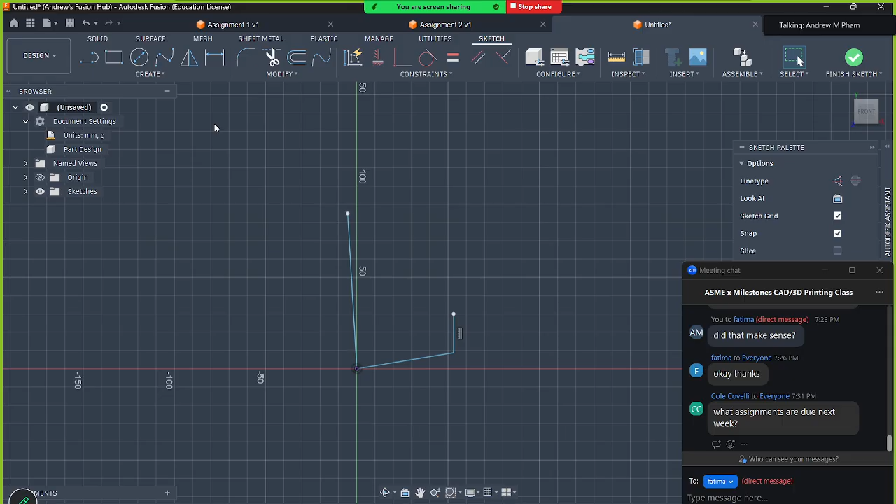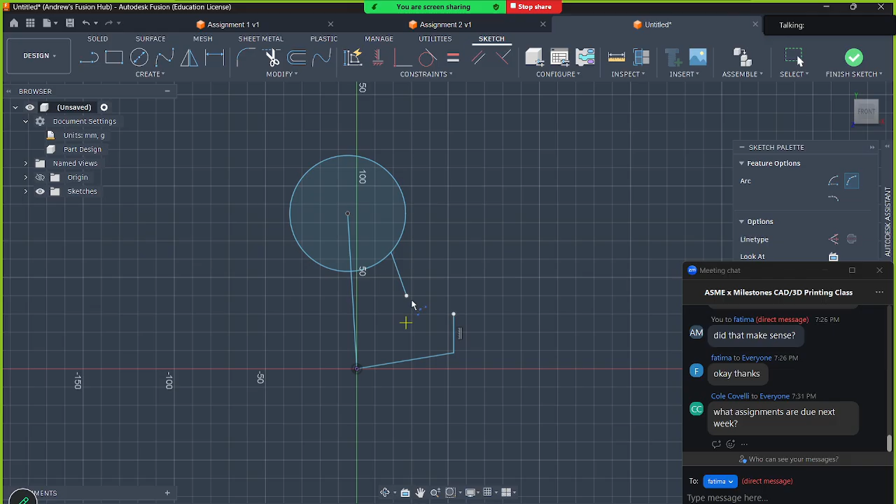So I have these 3 lines here. I know there's going to be a circle up there, some line going this way, and then an arc that connects these 2 points. I'm going to go under Create, and make an arc. In this case, I'm going to use a 3-point arc. So now we have this very corrupted looking profile of this game piece, but now we can start to refine it.

I'm going to use a couple of geometric constraints, which is kind of a week 2 thing, but this is a sneak preview. I want this line to be horizontal and this line to be vertical. So I'm going to use the horizontal and vertical constraints to snap these into the right spot. They turned white, which is good.

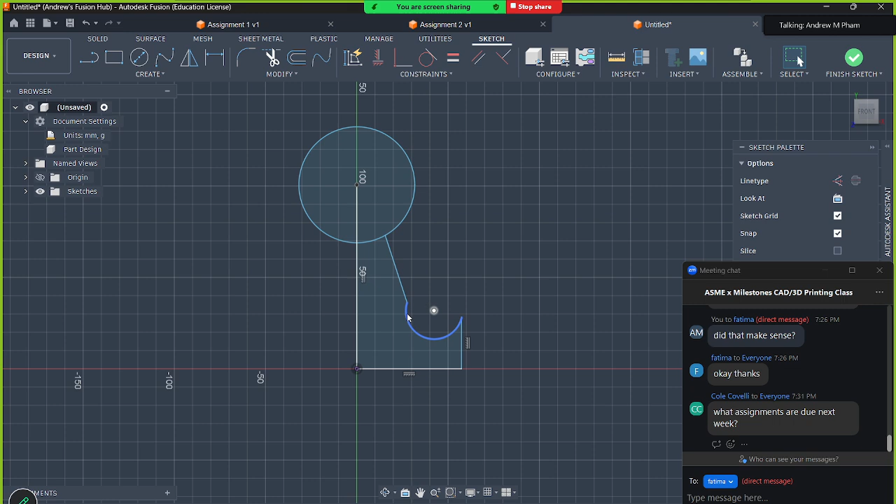For this, there needs to be a smooth transition between this diagonal line and this arc, so I'm going to use the tangent constraint here, selecting the line and the arc. Now it's nice and smooth. That looks good to me.

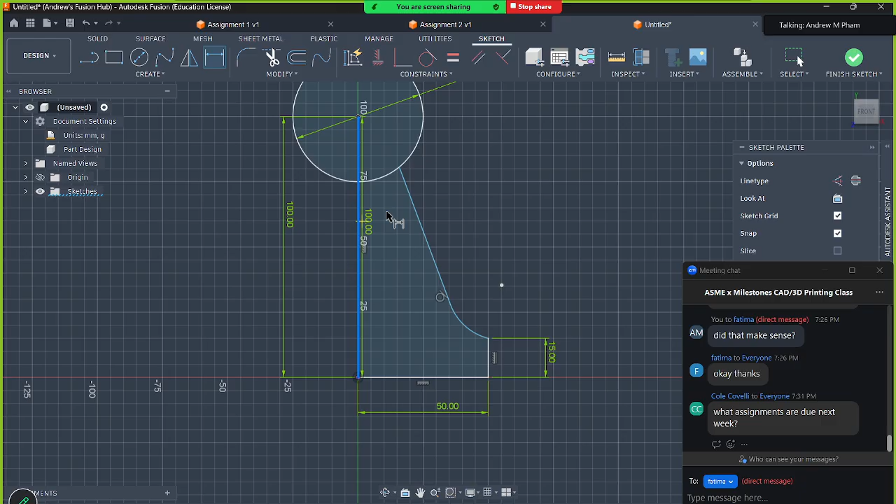I'm going to start adding dimensional constraints. Maybe this will be 25... I guess it's 15 now... 50. Then for this line here, you can use the dimension constraint to set an angle. I'm going to click on this vertical line and this diagonal, and you can see I can specify an angle, so I'm going to do 20 degrees.

I need to specify this radius, and then I think I need one more, like that. So this is fully constrained.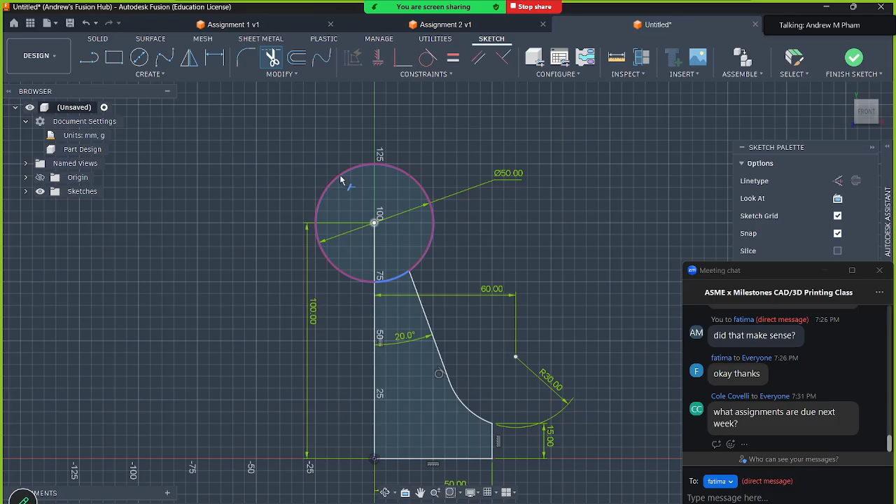It's almost done, you can see here there's a bunch of separate parts, so I'm going to need to add a little bit more. I'm going to add one vertical line going here, and then trim away the excess. So trim, I'm going to cut this line here, or this arc, and then cut this away, there. If I didn't have this vertical line here, and tried to trim away, it would trim this whole piece away, which is not what we're looking for.

All right, so that looks good. I'm going to trim this and that, and now we have a completed profile.

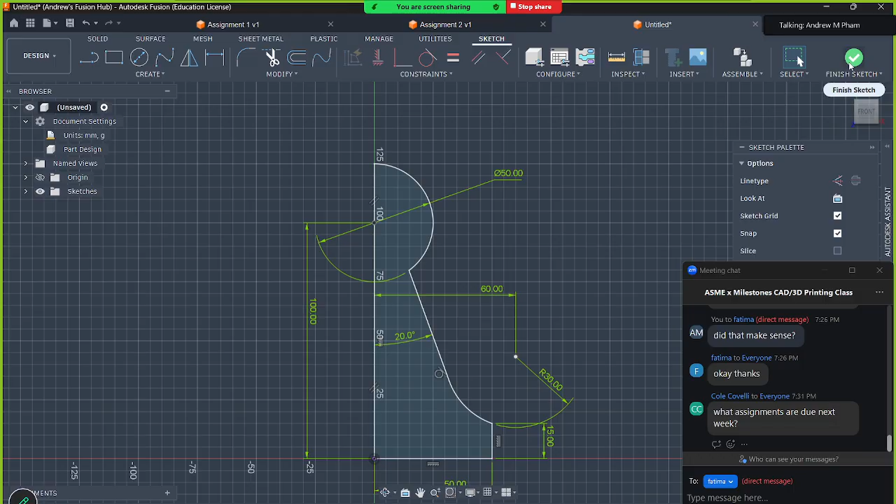I'm going to finish that, and revolve it just like I did for the cylinder, right? I'm going to select the profile, and then the axis. In this case, it's this vertical line here. And we have a nice game piece.

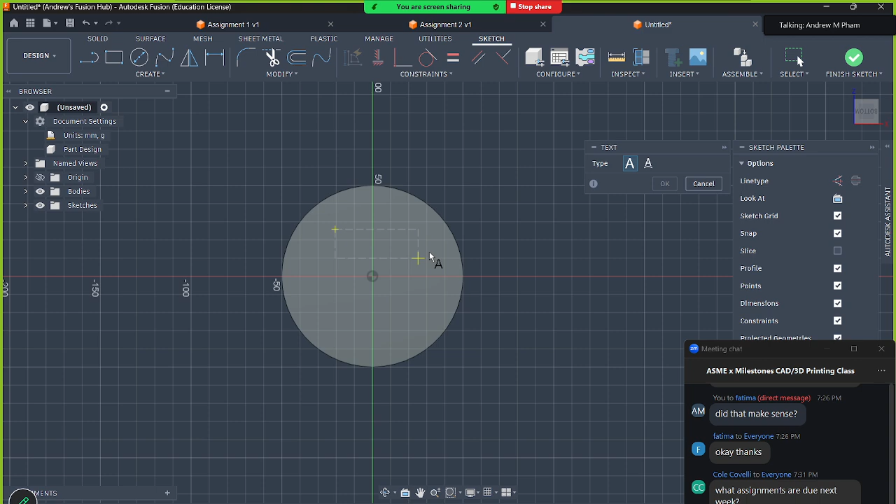We need to add text at the bottom. I'm going to create a sketch selecting the bottom face, and then go under Create Text. I'm going to make a text box here and write some stuff.

Make sure you leave the little apostrophes on both ends, because if you don't have it, I think the text doesn't work. So yeah, make sure it's there. Select OK.

Finish the sketch, and then we're going to extrude it. So Fusion will default in some cases to select things that you don't want. In this case, it selected the whole bottom face, which is not what we want. We just want the text, so I'm going to delete the selection, and then I'm going to zoom in.

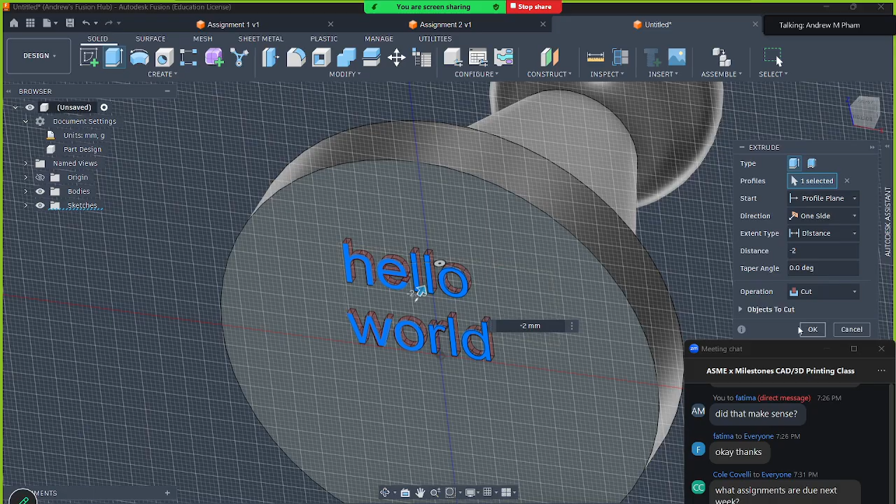Click on the text that we want. And then I want it to go into the game piece. So this arrow is going out of the game piece, so I want it to go the opposite direction. So I'm going to go like -2. You can see the operation changes from join to cut, which is good. And then I select OK. And now we have some nice text on the bottom of our game piece.

The last thing to do here is apply an appearance. So it's the same process as before. I'll make a blue game piece today. Just drag and drop after you open the library by pressing A. But yeah, that's about it for this assignment. And if you're following along, you can just take screenshots and submit that after you finish the homework assignment.

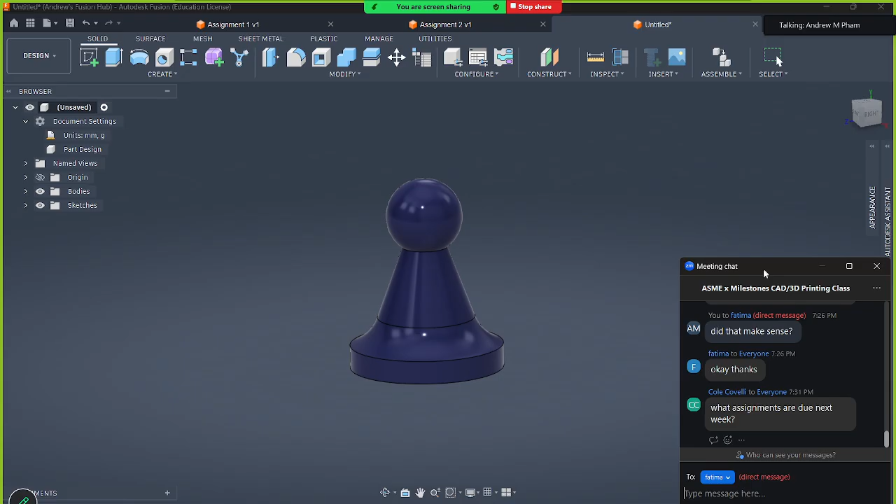Does anyone have any questions about this game piece? I know I went a lot faster compared to the other assignments.

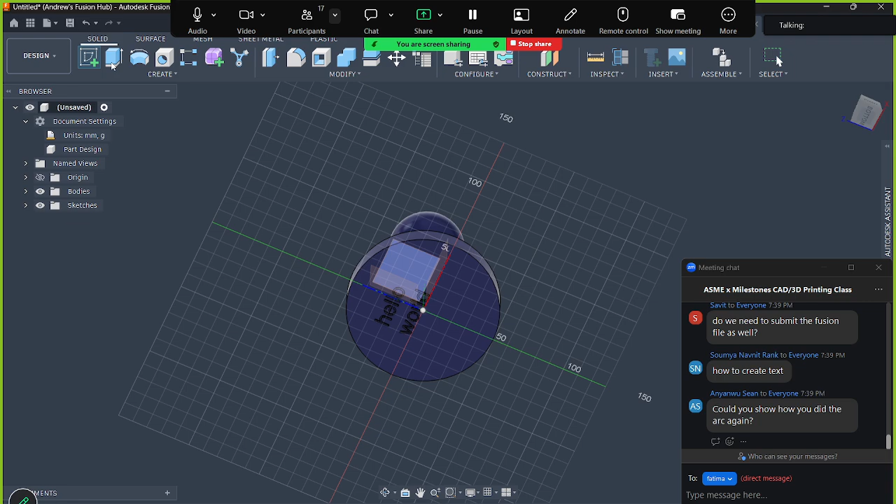The text, you need to make a sketch. So you create a sketch on the bottom, and then it's create text. So sketch, create text right here. Yeah.

How to do the arc again. I'm assuming you're talking about this diagonal one here. So for this diagonal here in the arc, is create. For the arc, it's create arc and then 3-point arc. And then you just select the ends of this line and that line.

Do we need to submit this Fusion file? No, you don't. I just need a screenshot.

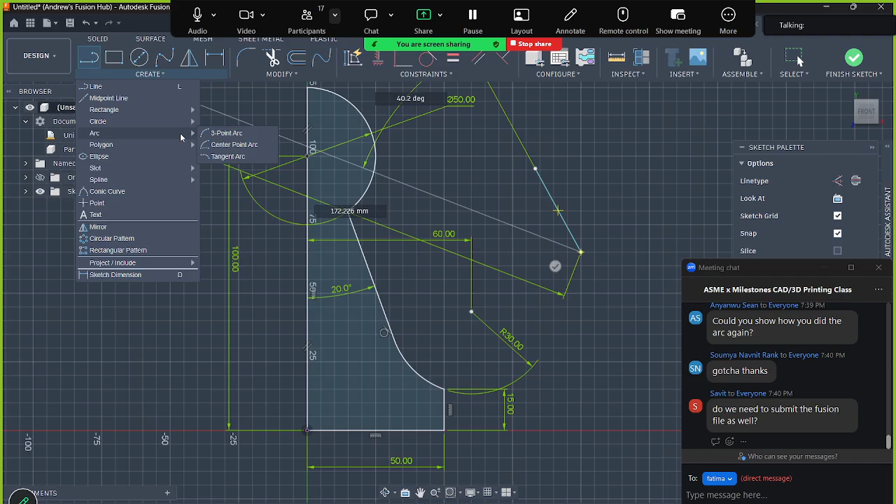Okay, so we have like this, right? To make the smooth transition, you use the tangent constraint here, and then you just click on the line and the arc. And it makes it nice and smooth. Is that what you're asking? Cool.

All right. Any other questions? If not, then I'll move on to explaining the homework, because I know we're over time today.

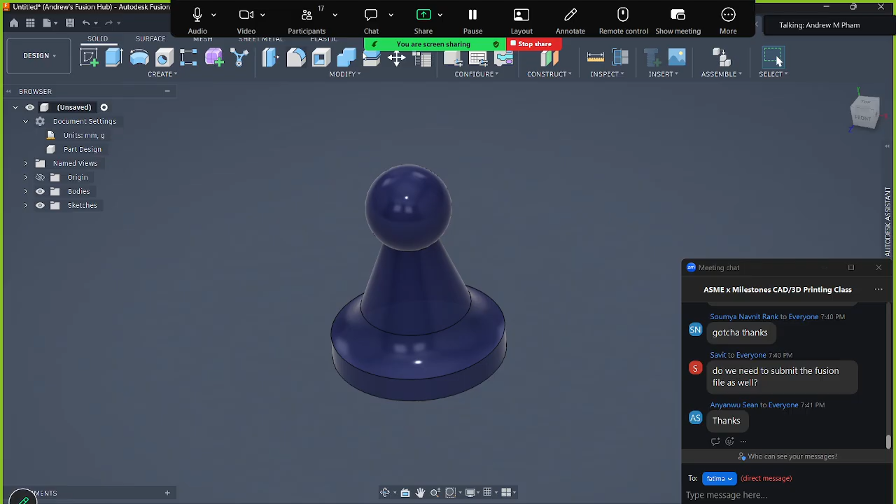I had a quick question. Sure. Earlier I thought for the shapes those would be submitted separately. So do you want me to just take a screenshot of each shape, or add them all to the same file? I mean, if you want to submit 3 different screenshots, that's totally fine too. Okay, I just did them in one, just because it makes one screenshot. But if you submit 3 screenshots, it's not a big deal. Okay, yeah.

But yeah, these homework assignments are pretty open, so we encourage your creativity. I've seen a lot of really nice chairs. I've seen a lot of cursed chairs that look really funny. So feel free to go ham on this. It's just kind of here for you to take inspiration, but you can make whatever you want.